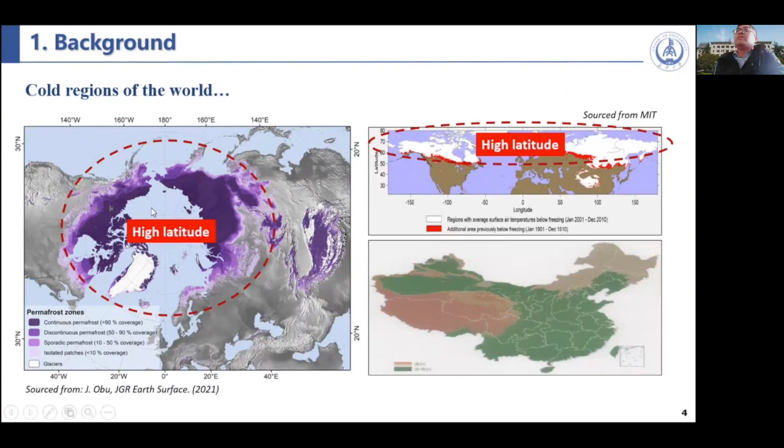First, the cold regions cover a large amount of the surface area of the Earth. There are two kinds of cold regions. The first is regions with high latitude, such as North America, the Nordic countries, and Russia. The second kind of cold region is high altitude regions, such as the Qinghai Tibet Plateau in China and some other mountains.

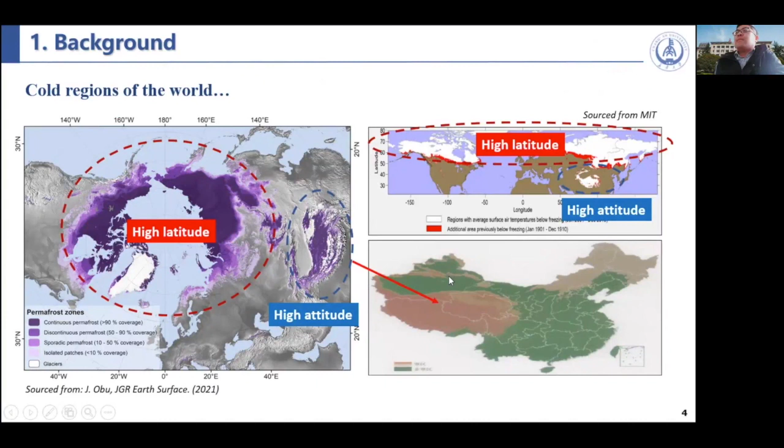For China, there is a large amount of area that will be faced with cold regions and cold climate, such as the Qinghai Tibet Plateau and some other provinces in the north and northwest. In this area, the transport infrastructures have been faced with harsh climates. The harsh climates affect the materials' behavior and the structures of infrastructure. Especially the winter event will attack the infrastructures, not only on transportation, but also break or affect the materials and structure, such as bridges and pavements.

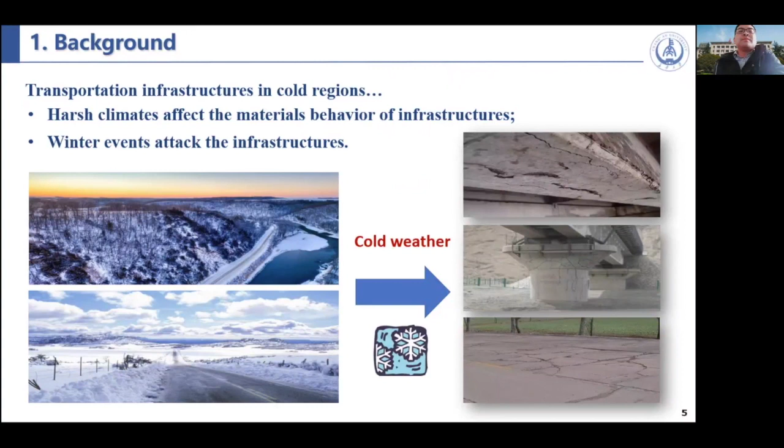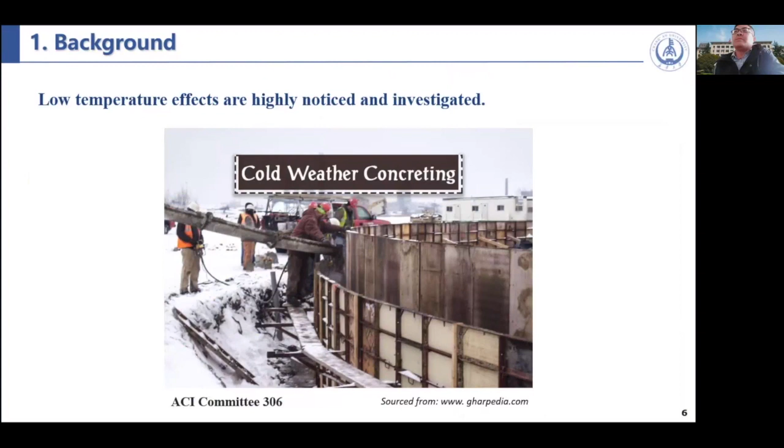Considering the harsh climates, one important element, low temperature effects, are highly noticed and investigated, such as cold weather concreting methods, and there are some standards not only in China but also in the USA and other countries. However, another thing, the lower air pressure, is always less concerned in infrastructure engineering, and even in some conditions, the lower air pressure is ignored in concreting.

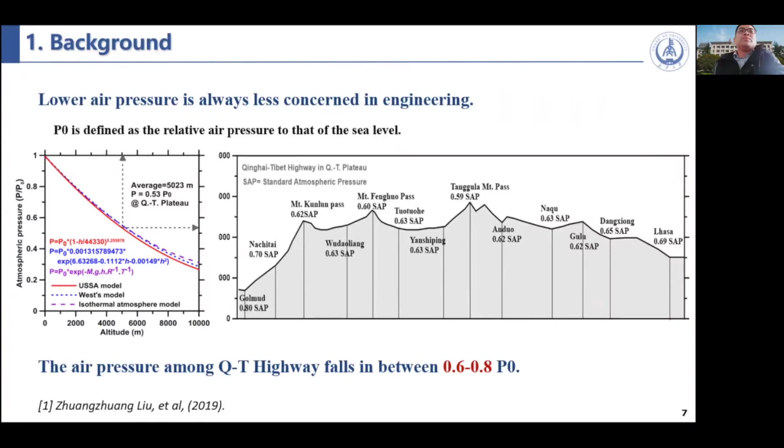This figure shows the relationship between air pressure and the Qinghai Tibet Highway. Among the Qinghai Tibet Highway, we can see the air pressure falls in between 0.6 to 0.8 P0. So in this area with high altitude, we always know that human beings and animals will have to be faced with altitude reaction or altitude sickness.

Is it that cementitious materials or cementitious composites, such as concrete, paste, or mortar, will also be faced with altitude sickness or altitude reaction? That is the question. So in our study, we did a lot of research focused on this topic and this question.

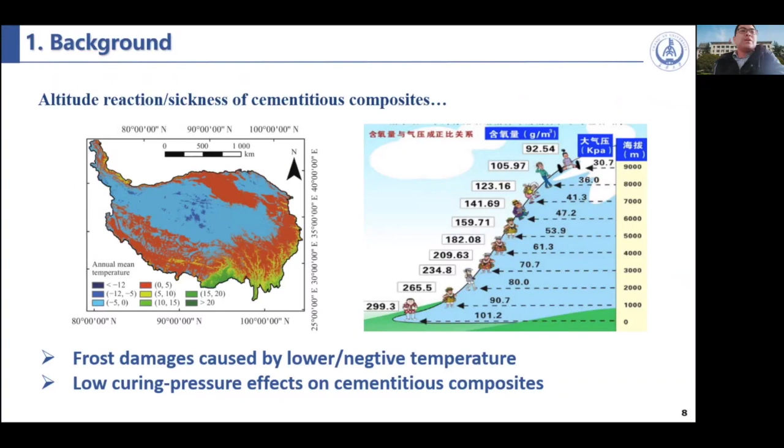Today, we want to introduce two parts. The first part is the frost damages caused by low or negative temperature. The second part, we want to introduce some basic results or conclusions we got in our study on the lower curing pressure effects on cementitious composites.

The material we used is commercially available in China, ordinary Portland cement produced in Shaanxi province, and the chemicals mixed into the cement include calcium chloride, sodium nitrite, and some other salts. All the cement was measured and meets the required specifications in China.

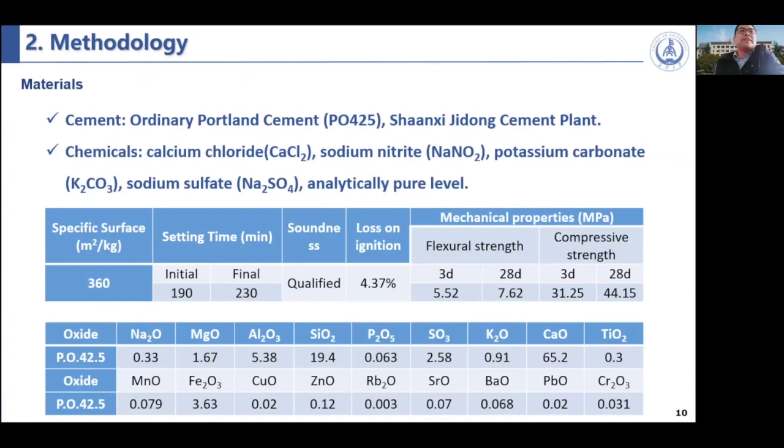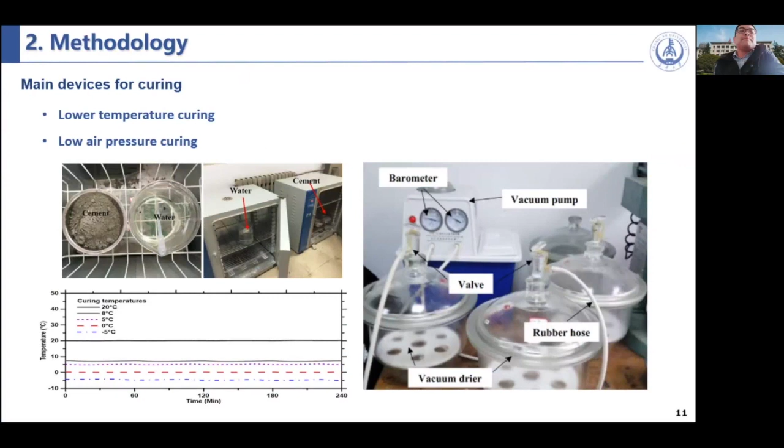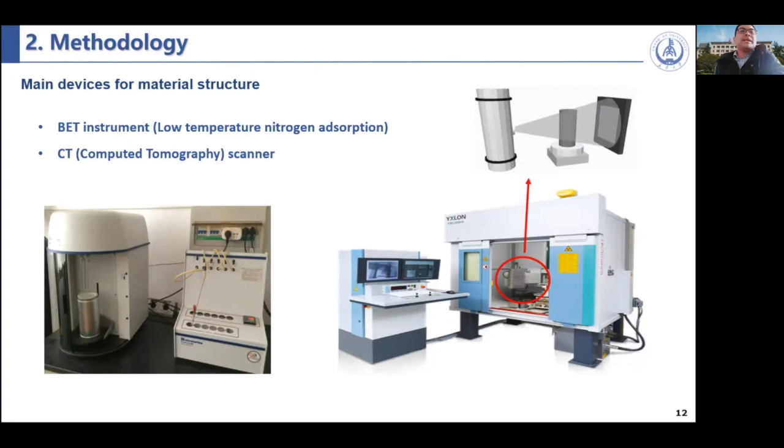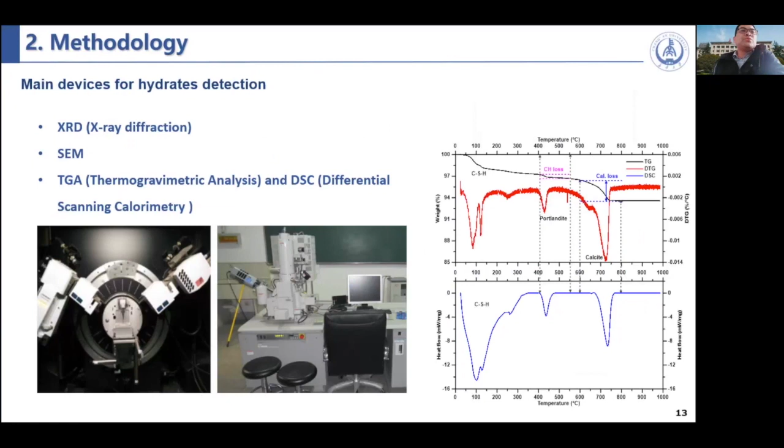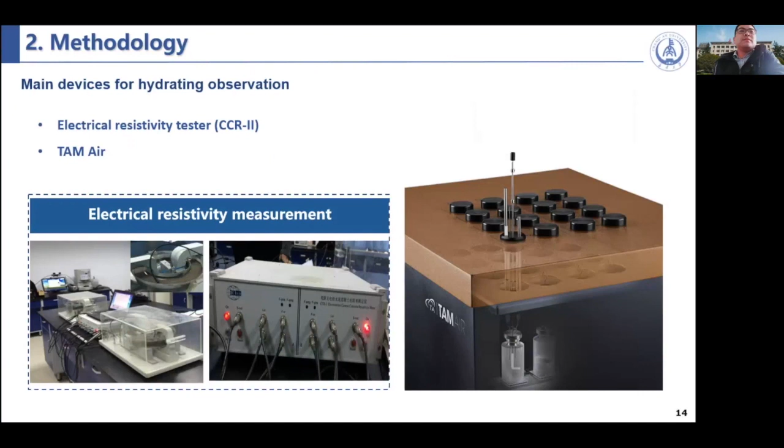We also use the BET and CT scanner to measure the material structures, especially the microstructure and macrostructure of the hardened concrete paste and materials. We also use XRD, SEM, and TGA to determine the hydrates during the hydration. We also use the electrical resistivity tester produced by Hong Kong, the relative researcher is Li Zongjing. We also use the TAM Air to measure the heating and hydration process during hydration.

The experiment or research can be divided into 3 parts, as we stated in the introduction initially. First, we want to know the effects on cement paste by lower curing temperatures. Second, we want to know the microstructures affected by the lower curing pressure. Then we did some modeling based on the Gibbs free energy minimization criteria.

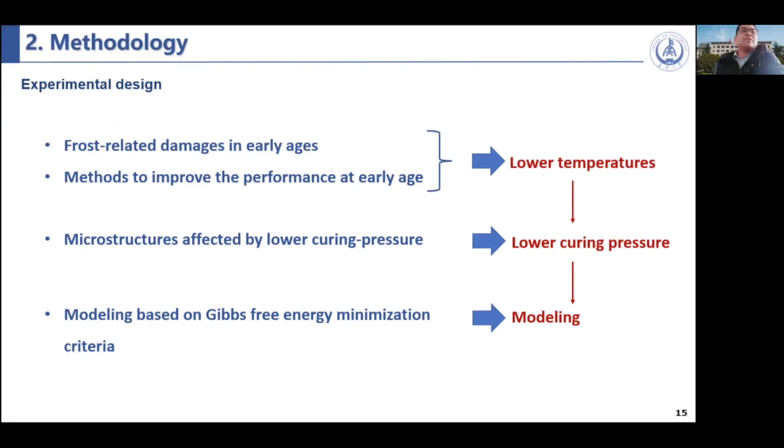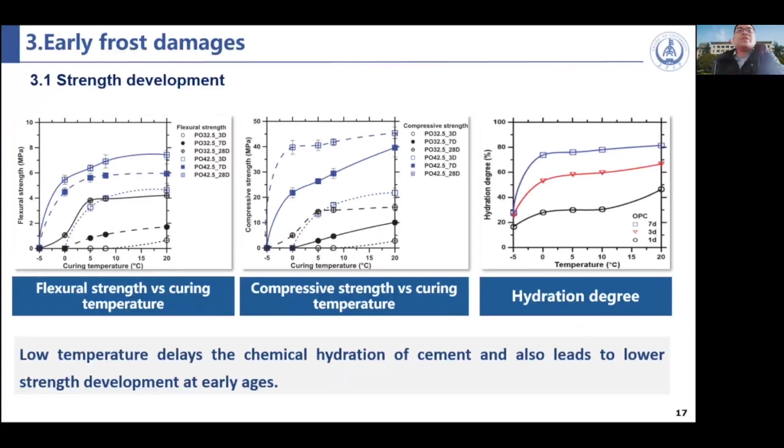We will introduce the current early frost damages we completed before. This is the basic knowledge that the strength during lower temperature will be reduced. There's nothing more to discuss here because it's a general result and conclusion we already know. But what I want to show is that the flexural strength and compressive strength are highly related with the hydration degree during different curing temperatures.

So after that, we mixed and produced the cement paste at each temperature. We want to know initially, at the earlier age, how the negative temperature affects the structure of the material and the performance of the cement paste.

Based on the methods from Professor Li Zongjing and Professor Xiao, the cement hydration at early age can be described by 5 stages: dissolution stage, dynamic balancing stage, setting stage, hardening stage, and hardening decelerating stage. During hydration, the setting stage is between the initial setting and the final setting.

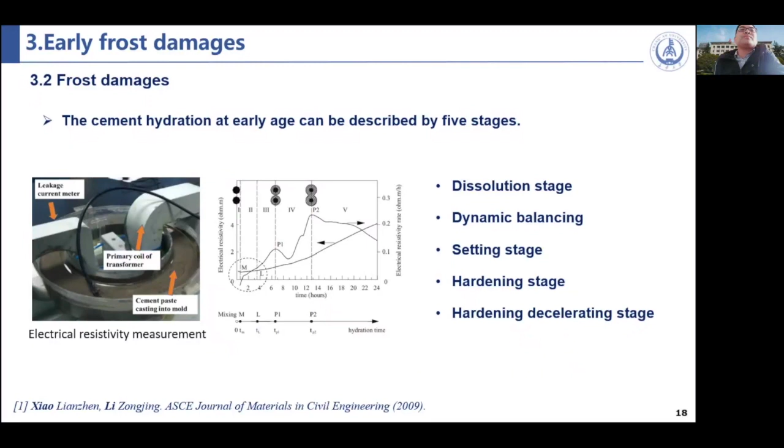So we want to know the first frozen time - if the first frozen time is located at a different stage, what will happen? First, we measured our cement paste using this machine, and we got the 5 stages, especially the 5 stage points, based on the electrical resistivity during hydration.

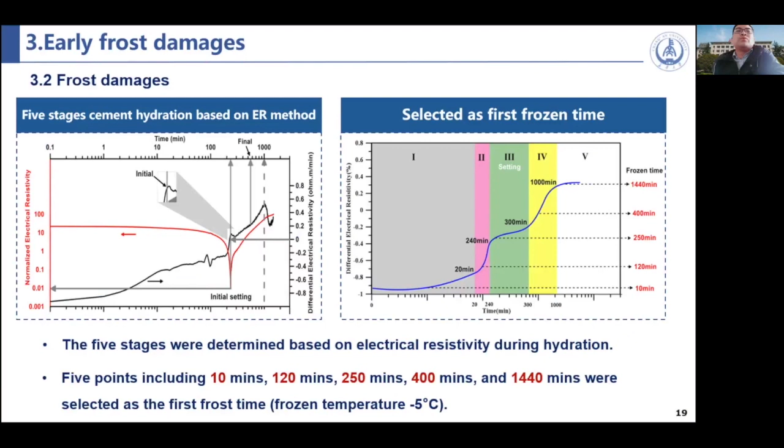And then we put the cement paste under the standard curing condition, and at the relative time, we move the sample to the negative temperature, so that frost damages will appear in the cement paste.

This is the mechanical behavior after frozen. We measure the strength - we can see the strength evolution, the strength still develops under negative temperature, and the composites with first frozen in the hardening decelerated stage show less reduction in strength. Just the black point and the red point, you can see, are very close.

And also before the final setting, that is in the first 3 stages - the dissolution stage, the dynamic balancing stage, and the setting stage - the strength is highly reduced, especially for this stage and this stage.

And there is nearly no strength in the first 2 stages, such as this point and this point - the dissolution stage and the dynamic balancing stage. If the first frozen exists in the dissolution stage and the dynamic balancing stage, the structure and material will be damaged totally.

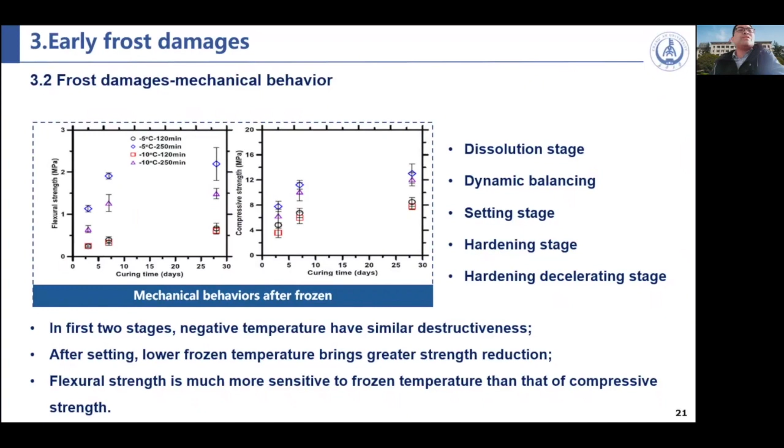What happened to the structure of the cement paste, especially the hardened cement paste? We use the CT scanner to get the structure of the cement paste. This is the mechanism, or workflow, of the 3-dimensional reconstruction with the CT scanner.

This is the tomographic images of the samples - the first 5 are from the 5 stages, and this is the control sample without frozen damage. We can see clearly that the damage during the first 2 stages is greater, and in the last 3 stages, the damage is less.

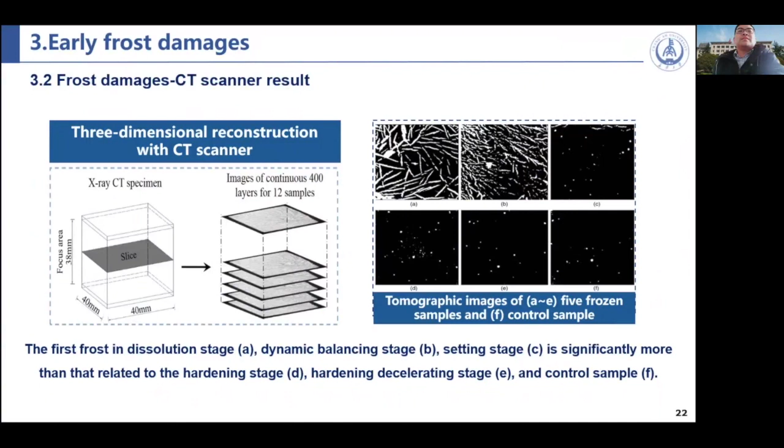This is the porosity of the cement paste, measured using the CT scanner. We can see that the porosity of the cement paste is reduced with the delay of the first frozen time, from 30% to 3%, especially for the first frozen.

If it happens after the final setting, the porosities showed nearly no changes, especially for the last 2 points.

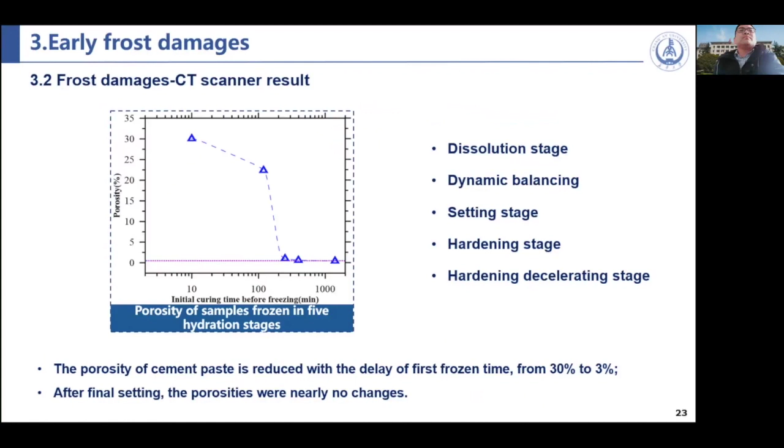We also got the 3D structure of the damages using the CT scanner. We can see the delayed damages, the layered damages appear in the samples frozen in the dissolution stage, and the dynamic balancing stage, for these two.

Bubble damages happen after the final setting, such as in this one and this one. This is the control sample. Also for these stages, it's combined with the layered damage and bubble damages.

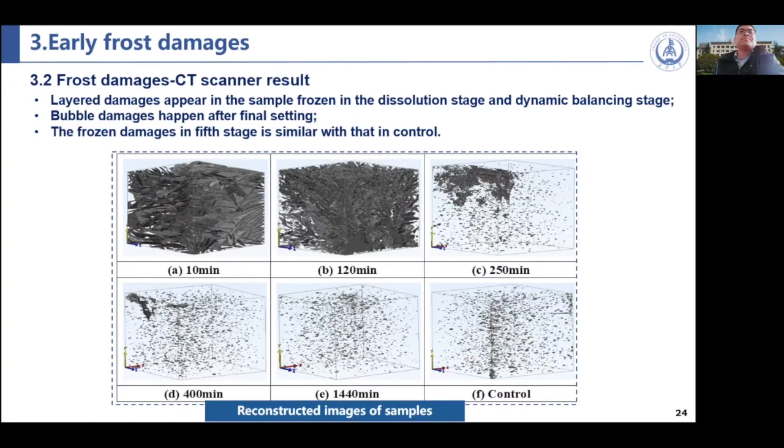The frozen damages in the fifth stage are similar to this control sample. So compared with the damages in the cement paste, we summarize 4 types of frost damages in the early ages.

The first one is before initial setting. We define it as type A. The damage is caused by the flow extrusion of the paste. That means the cement paste is damaged by the freezing of the moisture in the cement.

During the setting stage, the flow and expansion cracking damages happen together, and the strength will be reduced, and the performance is worse than the control.

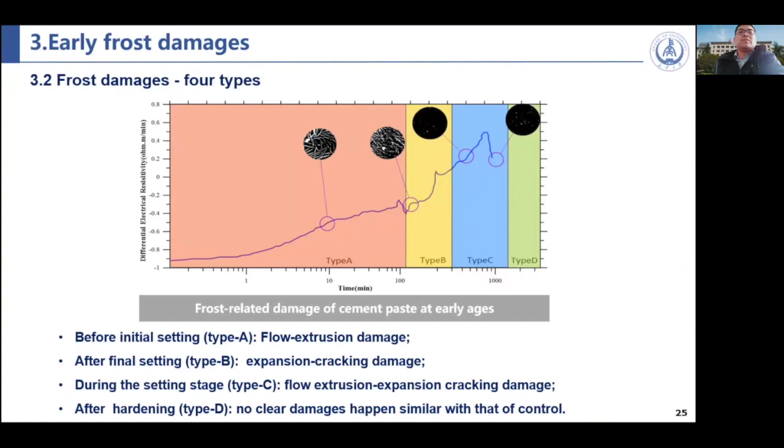So we call it type D. There's no difference, or the difference is much less than the control sample.

Then we wanted to find some treatments against the early frost damages, to improve the performance at the early ages. So we use two methods. First, we treat the sample by pre-curing.

We put the sample under the standard curing condition, and then cure it at 5 degrees, which is lower than the standard condition. The pre-treatments in our study include pre-curing and chemical modification.

This is the pre-curing effect and treatment on the mechanical properties of the cement paste. We can see the longer pre-curing treatment causes a reduction of the mechanical performance. This is not as expected, as we carried out the experiment before.

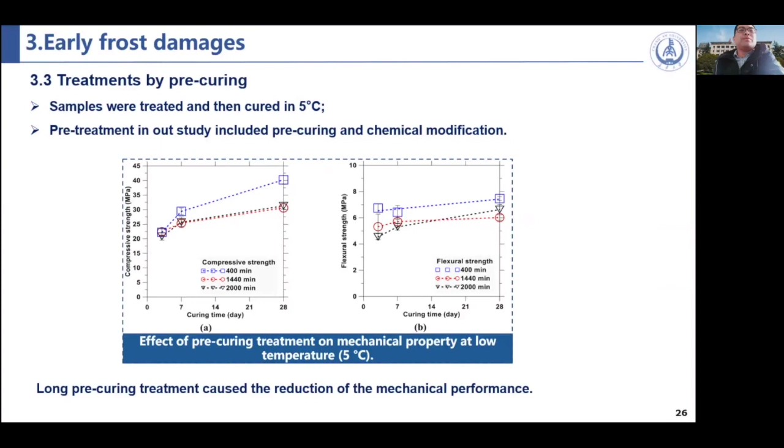We also used chemicals to treat or modify the behavior of the cement at the early ages. We can see both the flexural strength and the compressive strength were reduced by the chemical accelerators, except for the calcium chloride. This is also out of our expectation.

We always know that salt and chemicals, most chemicals, can accelerate the hydration and strength development of cement and concrete. However, in this study, we also got a similar result as the pre-curing treatment.

So we can conclude from this result that it should be very cautious to use chemical accelerators together with pre-curing in cold regions, because in cold seasons, the improvements might offset each other, or an unclear strength development will appear.

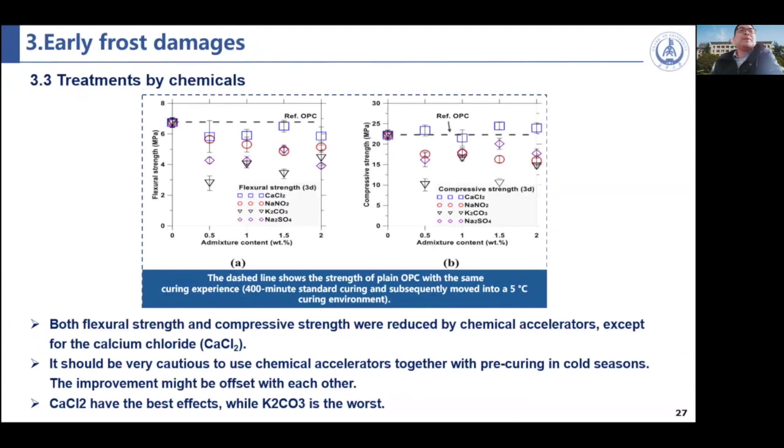We also wanted to know what happened during the cement hydration with the chemicals, how the chemicals influence or affect the cement paste, especially on the strength development.

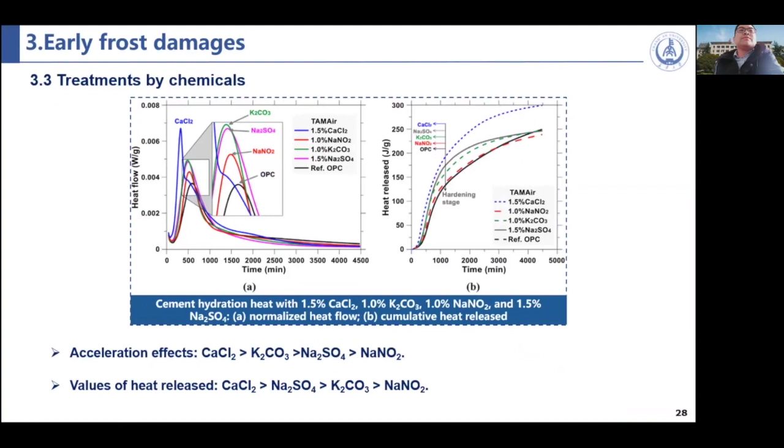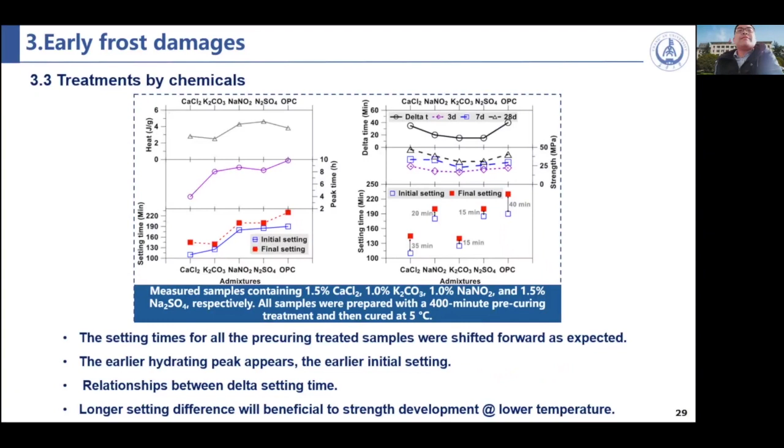So we can see the longer setting difference will be beneficial to the strength development, especially at lower temperatures.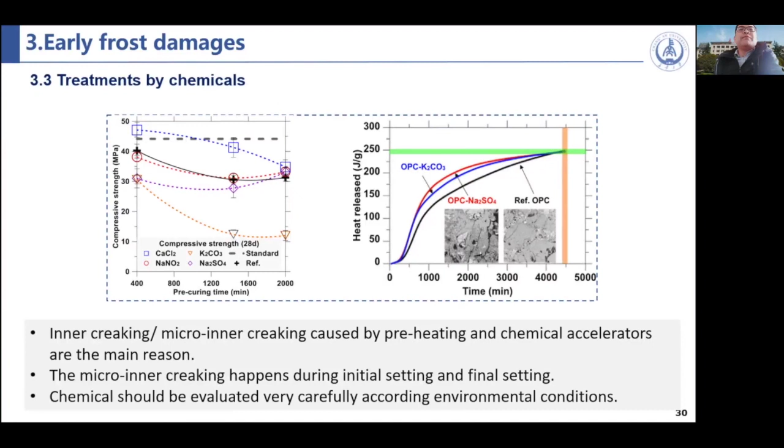We have some discussion and comments on this phenomenon because the inner cracking or micro inner cracking is caused by preheating or chemical accelerators, which are the main reasons for reduced mechanical behavior or strength during the early ages. The micro inner cracking happens during the initial setting and the final setting. This is what we all know before, and the chemical admixtures should be evaluated very carefully according to environmental conditions.

We will introduce some conclusions about the lower curing pressure effect, especially on the microstructure. This is the degree of hydration during lower pressure. We carried out the study under 0.2, 0.5, 0.8, and 0.9, and P0. We can see that during the first day of hydration, the lower curing pressure affects the hydration degree, but later, up to 3 days, the curing pressure has less effect on the degree of hydration.

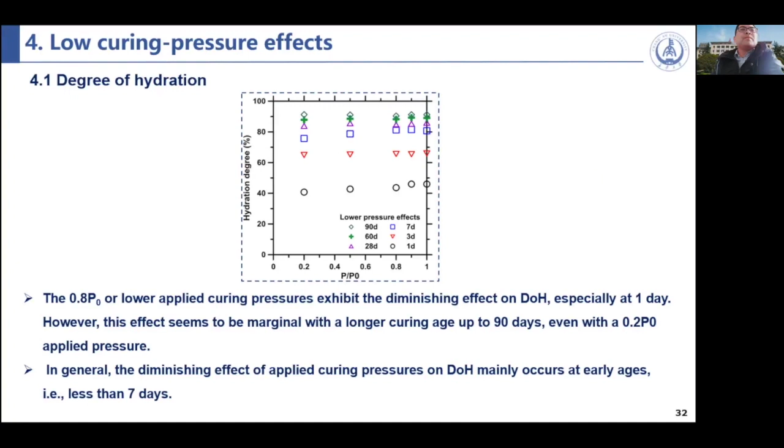Why did we choose 0.8 and 0.5? Because, as we introduced before, in the Qinghai Tibet Highway we are facing these problems. So we chose this range to measure the low curing pressure effect.

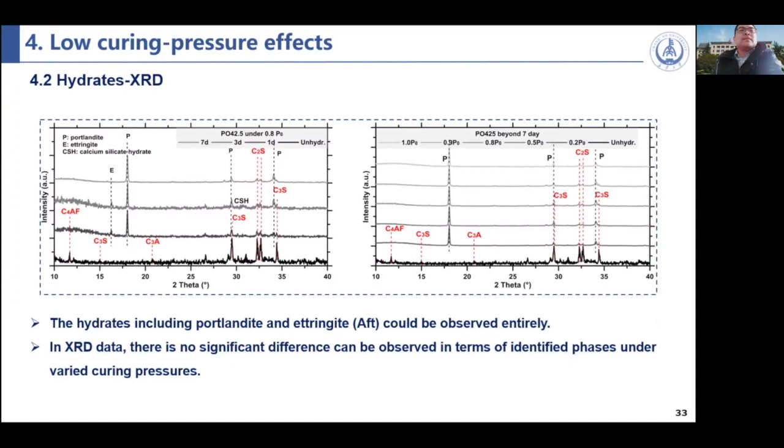We use XRD to detect the hydrates during hydration. We can see that there are no differences between the cement hydrates under lower curing pressure and under the general or standard curing pressure. There are no significant differences between them.

However, in the TGA measurement, we find some differences in this part. It means the water absorption in the CSH or the AFm or other hydrates is different, maybe because of the lower curing pressure or the structures of the hydrates.

This is what we got, the enthalpy and mass fractions during the TGA. We can also see very slight differences in the water fractions from this part, but the curve here is different. Also, we can see the Portlandite content is also different, especially reduced by the lower air curing pressure.

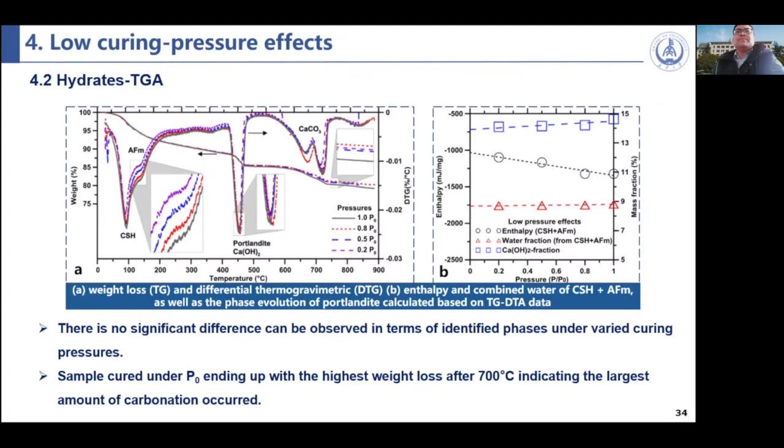We also calculated the microstructures, especially the pores in the cement paste. We can see the peaks in this figure can be divided into 3 groups: the first is about 3 to 20 nanometers, the second is 20 to 50 nanometers, and the third is 50 to 100 nanometers. We define the first group as micropores, the second group as mesopores, and the last group as macropores.

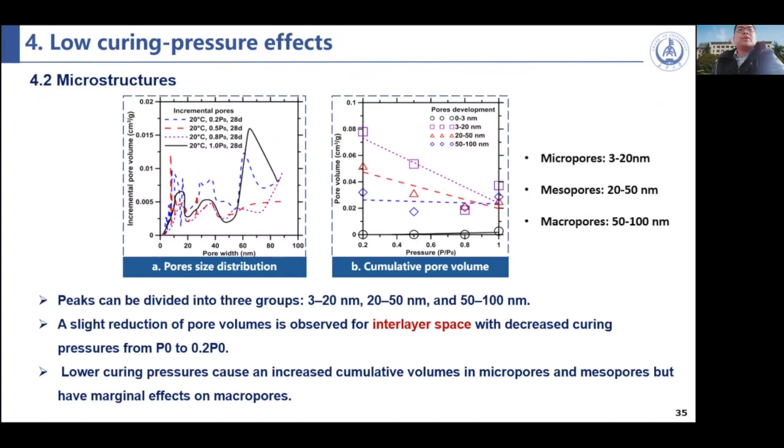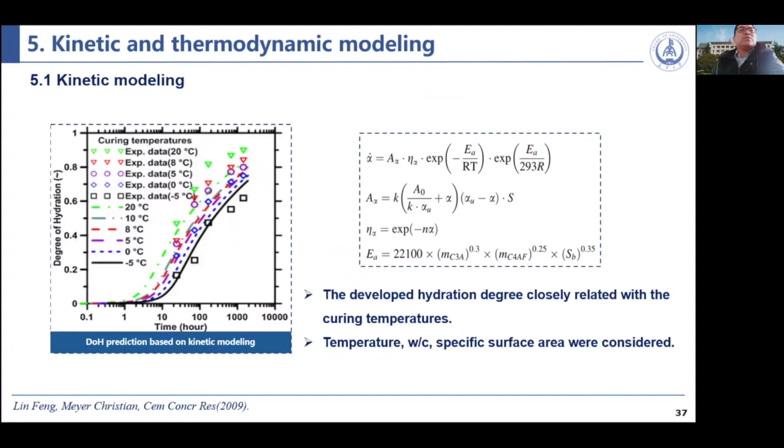We also did some modeling. First, we modeled the cement hydration under lower temperatures and lower curing pressure. The developed hydration degree is closely related to the curing temperature, and in the modeling we considered the curing temperature, the water cement ratio, and the specific surface area, and also included the lower curing pressure.

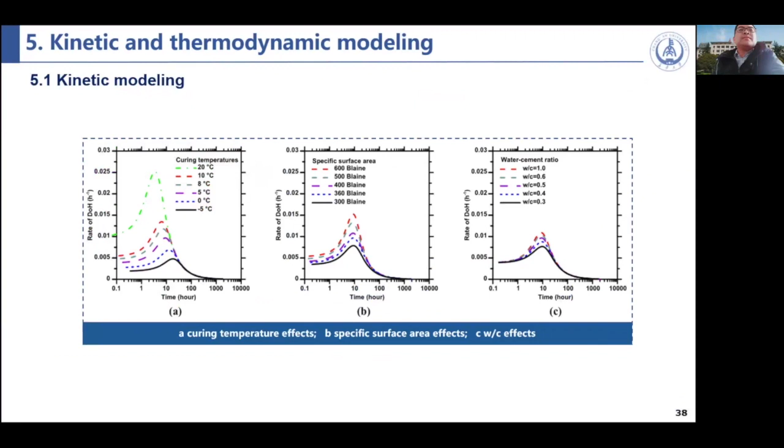This is some data and results we got from the simulation and modeling. We also used GEMS to do thermodynamic modeling under lower temperature and low pressure. The database we use is the CEMDATA developed by EMPA and the University of Aberdeen, and also PSI, and free energy minimization is also used in our research.

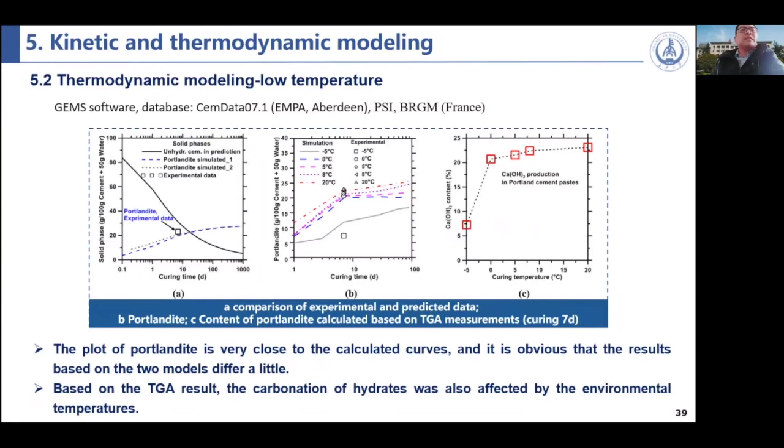We can see this point and this point are what we got from the experiment, and these are calculated values. It proves that our calculation and the experiment data agree well, and we also obtained the hydrates formed during lower curing pressure and lower curing temperature.

Based on our study, we summarize the temperature ranges and the effects at the lower temperature. It can be divided into 3 levels. The first level is if the temperature is negative, that means lower than 0 degree, the damages is irrecoverable.

If the temperature is located between 0 to 10 degree, that means the hydrates may be thermodynamically changing dynamically. So we have to put more focus on the phase changes during this temperature, and also the durability will be reduced at this temperature.

If the temperature is between 10 to 25 degree, we call it insignificant effects. That means the hydrates are stable, and the hydration is similar to that with the standard conditions.

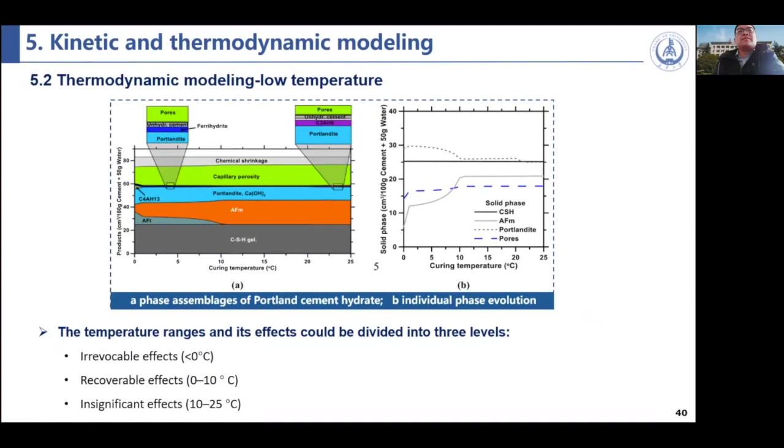We also did some modeling and experiments to find out why the lower curing temperature and lower air pressure will affect the microstructure, because we have known that the hydration is similar to the standard condition.

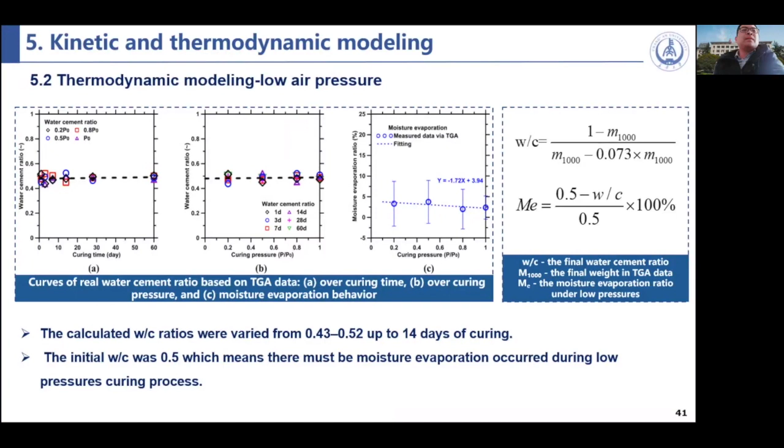We found that the calculated water cement ratio varied from 0.43 to 0.52 up to 14 days of curing, because moisture evaporation occurred during the lower air pressure curing. That is the main reason we found, and we also published the detailed discussion in our paper.

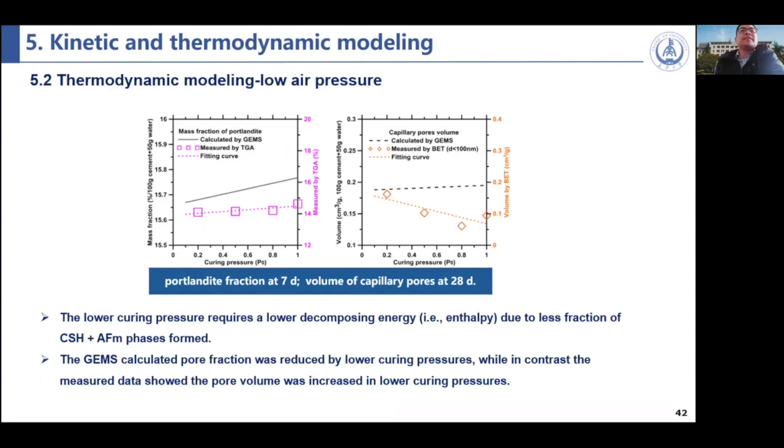And also we did some calculation between the mass fraction of Portlandite in the experiment and in the modeling, and also did some analysis of lower pressure effects on the pores in the hardened cement pastes.

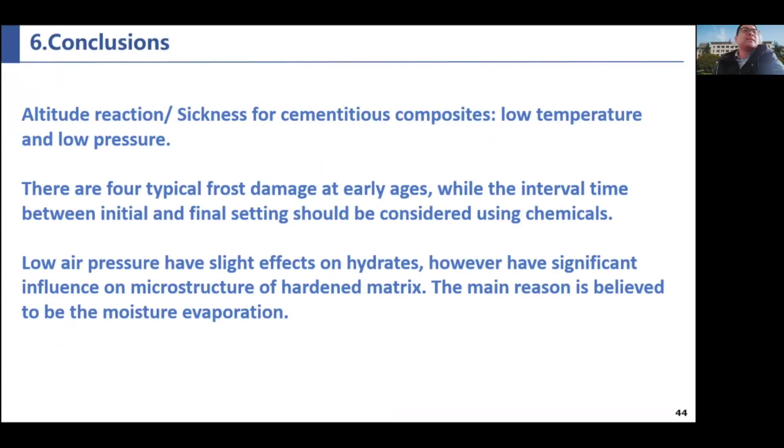Conclusions: based on our study, we know the altitude reaction affects the cementitious composites, including the lower temperature effect and the lower pressure effect. There are 4 typical frost damages at early ages, and the lower air pressure has slight effects on the hydrates, but however, it has a significant influence on the microstructure of the hardened matrix. The main reason is believed to be the moisture evaporation.

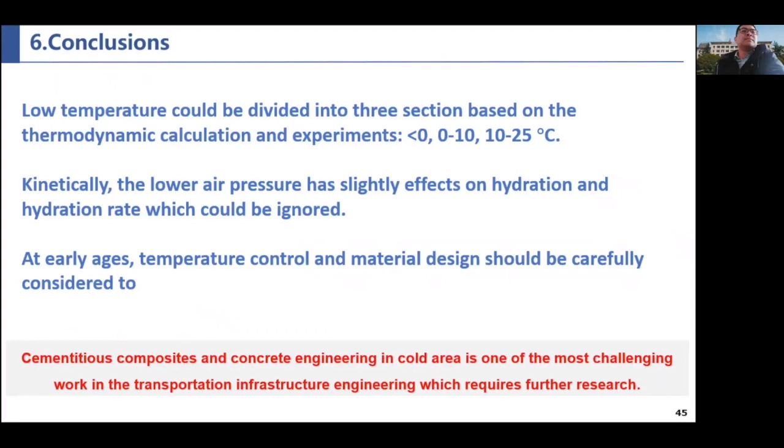The lower temperature could be divided into 3 sections based on the thermodynamic calculation and the experiments. Kinetically, the lower air pressure has slight effects on the hydration and the hydration rate, which could be ignored in real applications or engineering. At early ages, temperature control and materials design should be carefully considered to ensure performance during the service life.